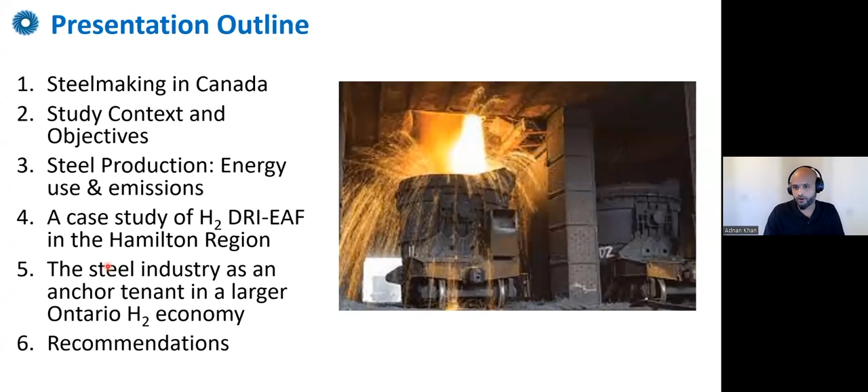So steelmaking in Canada and current decarbonization measures. When we talk about steel, steel is really deep rooted in our society. We cannot function without steel. It's really part of our daily lives. We use steel in different sectors, such as construction, industry, health, transportation, and other sectors as well. It's a key part of how we function as a society.

Now, Canada's steel sector is a $15 billion industry. We make around 13 million tons of steel products. We're among the top 20 steel producers in the world. And directly and indirectly, the Canadian steel sector employs over 100,000 people. So this is a rough number. On the graph at the bottom here, you can see the steel production by different countries. You can see Canada on the list, but quite obvious from the graph is there is one country that dominates global steel production, which is China, which makes more than 50% of global steel.

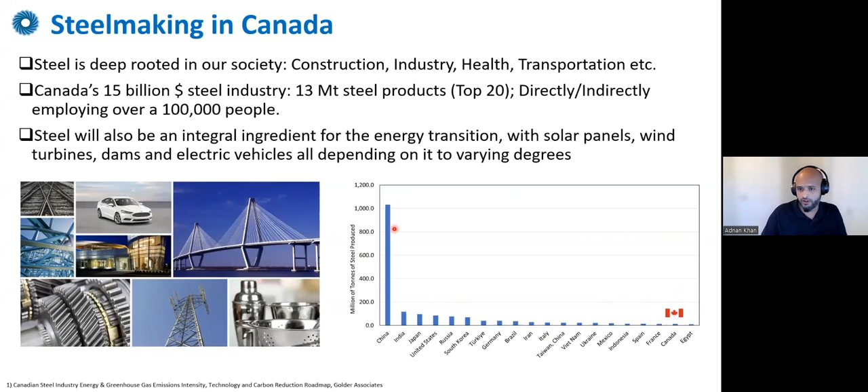Another important thing to highlight here is that steel will also be an integral ingredient for the energy transition, with solar panels, wind turbines, dams, electric vehicles, all depending on steel to varying degrees. So an integral piece of the energy transition.

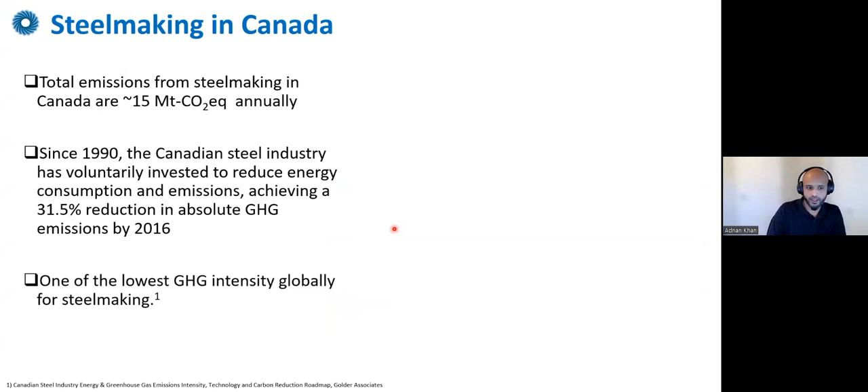Now, when we talk about the Canadian steel sector, the total emissions, like David was talking about, are about 2% of our country's GHG emissions, with about 15 million tons of CO2 annually. But what I need to highlight here is that since 1990, the Canadian steel industry has invested to reduce energy consumption and emissions, which has resulted in over 30% reduction in emissions by 2016. And this is one of the lowest GHG intensities globally for steelmaking.

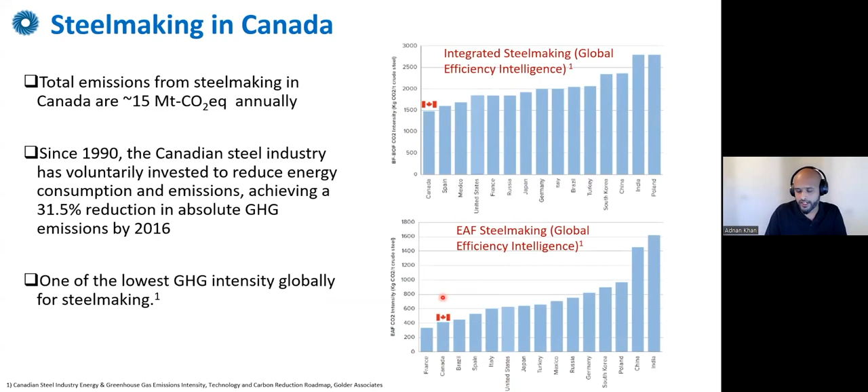The graphs here show 2 types of steelmaking. We'll talk about it in a couple of slides. On top is integrated steelmaking. You can see Canada is one of the lowest, if not the lowest, in terms of carbon intensity for integrated steelmaking. And also secondary steelmaking, which is through electric arc furnaces. Because of the low carbon electricity available in several provinces, we can make secondary steel with very low carbon intensities.

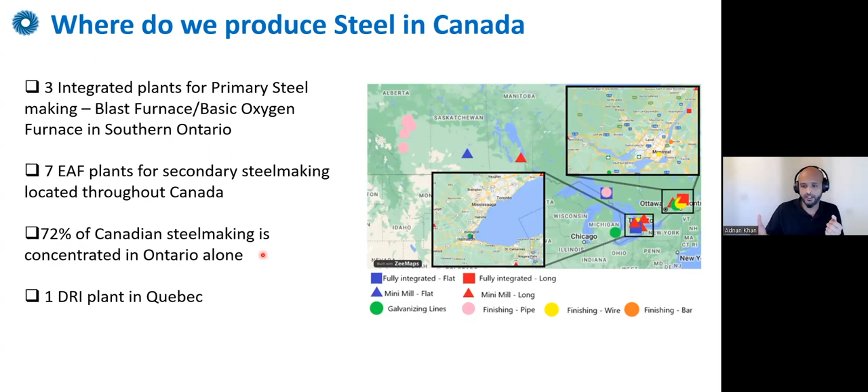Now, where do we produce steel in Canada? That's the first thing that comes to mind. We have 3 integrated plants for primary steel production that use the traditional route of blast furnace and basic oxygen furnace. I'll talk about it in a couple of slides. All 3 integrated plants are located in southern Ontario. We have 7 electric arc furnaces for secondary steelmaking throughout Canada. And 72% of our steelmaking is concentrated in southern Ontario. We also have 1 DRI facility in Quebec, and DRI is the core piece of our analysis here, and we'll talk about what DRI means in a slide.

So what do we do? Where does Canadian steel go?

In terms of our exports, Canada exports steel across the world, to more than 130 countries and territories, but primarily most of our steel goes to the United States, right? And that's really setting the context, that's some information on the Canadian steel sector and Canadian steelmaking.

And in terms of decarbonization measures, key announcements by the Canadian steel sector are as follows. So there's a few key announcements that came out recently. One is that Algoma Steel has announced transitioning from a blast furnace, basic oxygen furnace route, to a full electric arc furnace by 2026, right?

ArcelorMittal Dofasco plant has invested in a 2.5 million ton hydrogen-ready natural gas DRI furnace to replace the current integrated steelmaking. They've also tested, in their DRI facility in Quebec, partial replacement of natural gas with hydrogen. So these are some key developments in this transition to net zero for the steel sector.

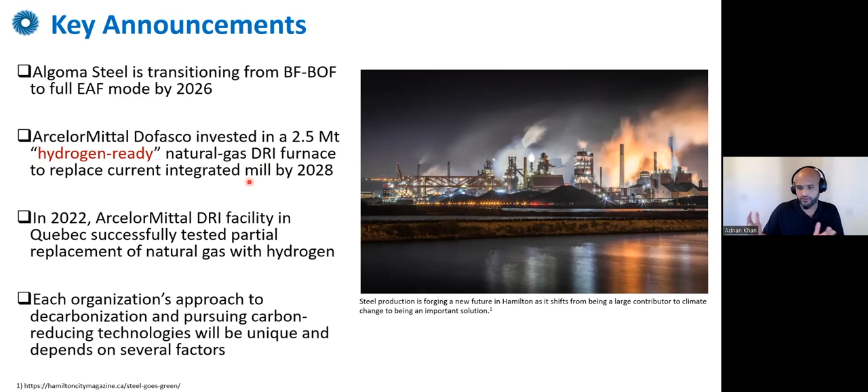But what I also need to highlight here, when I talk about all of these announcements, is that each organization's approach to decarbonization and pursuing carbon reduction technologies will be unique and depend on several factors. All right, so let me get straight into the study and really set the context of what the study was about. The study was in alignment with CSPA's vision to achieve net zero CO2 emissions by 2050.

The study is also very important in the context of a slowly developing market for low GHG steel as different industries look to decarbonize. And like I said before, there are various options for decarbonizing steel production being investigated, and the likely path forward will be a combination of several solutions. In the previous slide, I highlighted a recent announcement by ArcelorMittal Dofasco plant in Hamilton, which has committed to transition to a natural gas DRI facility, which has the potential to be hydrogen ready in the future, right?

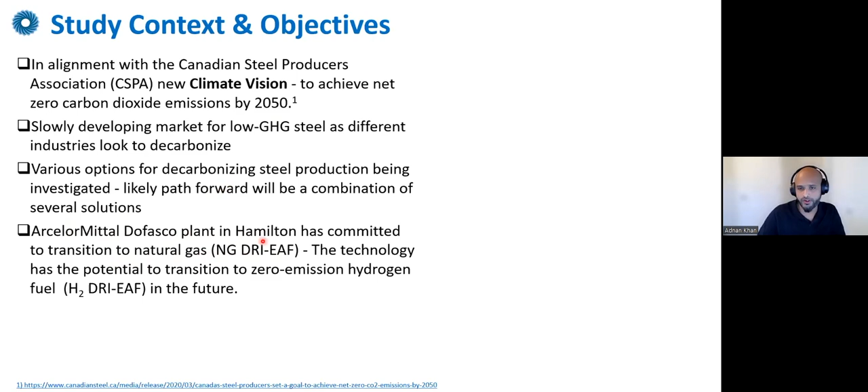So really the purpose of this report, and I'll take my time on this, is to explore the potential for hydrogen to decarbonize Canadian steel, with a focus on possible sources of low GHG hydrogen and the cost it will take to deliver hydrogen at scale to the Dofasco plant. So it's really around the Dofasco plant that our study was centered.

I also need to highlight for the audience that options beyond the adoption of hydrogen for steelmaking are not discussed in any depth in the report, but should be considered an integral part of the steel sector's decarbonization strategy. So that's important to keep in mind.

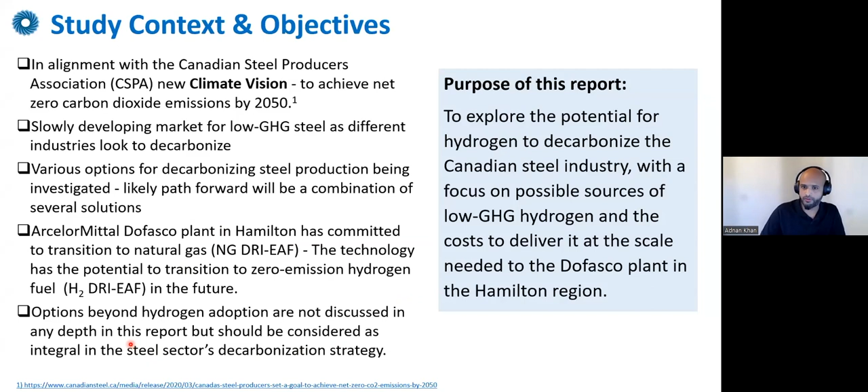The DRI routes, whether it's the natural gas DRI route or the hydrogen DRI route, typically use lower energy because the iron ore is reduced below its melting point. In the natural gas DRI route, we use natural gas, which is converted to carbon monoxide and hydrogen in the furnace, which is used as a reducing agent and also provides your energy source. Then the direct reduced iron can be converted to steel in an electric arc furnace.

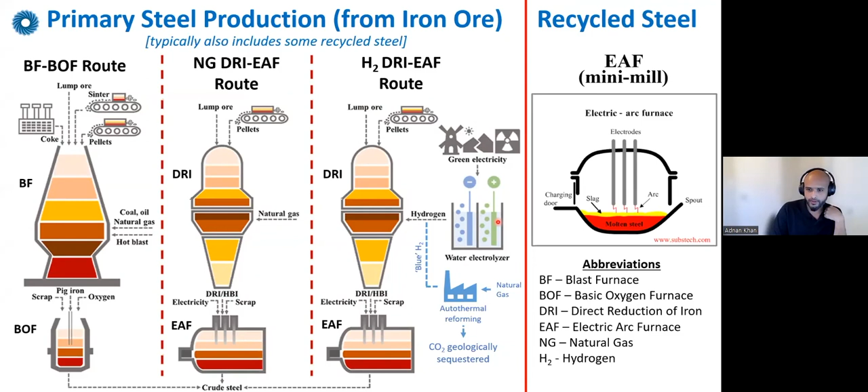And just 1 second. All right.

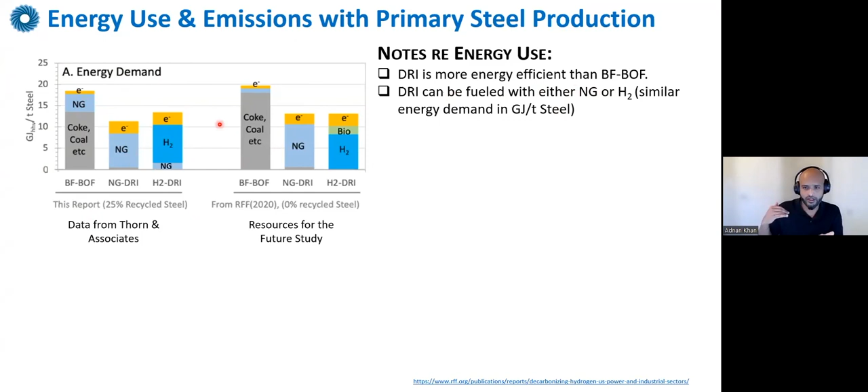The DRI can be fueled with either natural gas or hydrogen. If you look at both sets of data, the hydrogen DRI route requires similar energy demand versus the natural gas DRI route. But then when we look at GHG emissions, and these are basically scope 1 direct emissions, compared to the traditional blast furnace, basic oxygen furnace route, on-site emissions could be significantly reduced by the transition to a DRI route. So when you transition to natural gas, you could potentially reduce emissions by about 70%.

But another key thing I'd like to highlight here, which is really the key takeaway message from this slide, is this. Now, compare natural gas DRI versus hydrogen DRI. Let's talk about this transition, which is going to happen in the Dofasco plant, which we're envisioning. Assuming a natural gas price today of $5.50 a gigajoule, and at best case scenario, if you assume a hydrogen price of $2 to $4 a kg of hydrogen, which is basically about $14 to $28 a gigajoule.

What straight away strikes you is the fuel energy price with this transition from natural gas DRI to hydrogen DRI will mean that your energy cost will be 2.5 to 5 times more. So the key message here is that minimizing the cost of hydrogen supply will be critical. We need to build supply chains that can deliver very low cost hydrogen if we really want to make this economically viable.

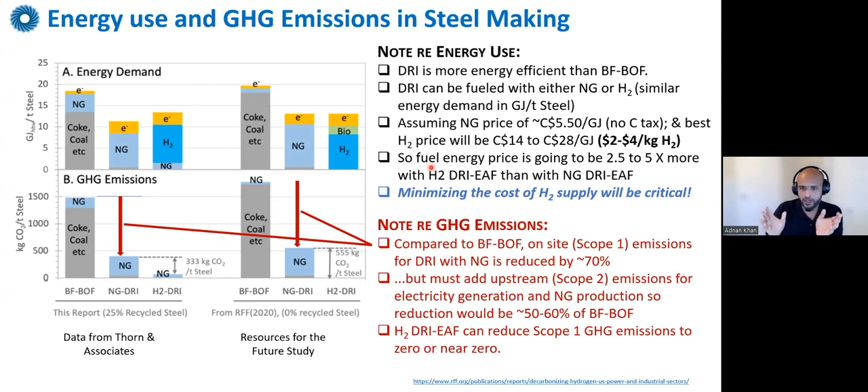With a forecasted decrease in the cost of these electrolyzers, we can afford slightly higher electricity prices in the future. But even in a situation where we have lower capital costs for electrolyzers in 2040, you will still require very high capacity factors for this electricity.

And you can afford electricity cost of slightly higher, about 5 cents a kilowatt hour or 50 Canadian dollars a megawatt hour, to make hydrogen at 3 Canadian dollars a kg. So that's about water electrolysis.

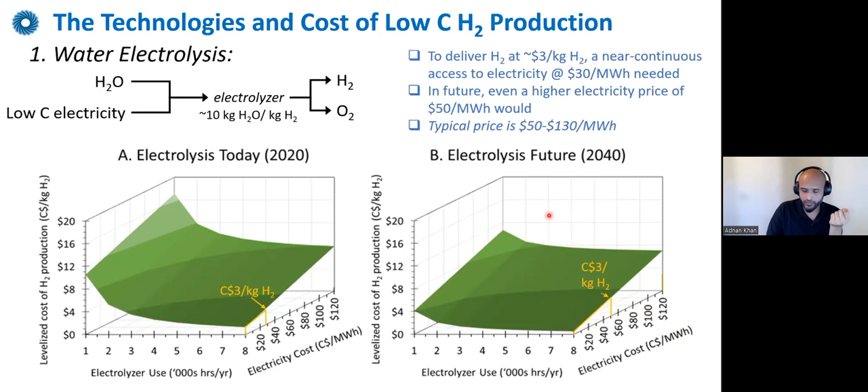So what about blue hydrogen now? Hydrogen can also be made by natural gas reforming, and that's how primarily we make all of our hydrogen in Canada, but also the rest of the world. And when we talk about natural gas reforming, you can do steam methane reforming, or you can do autothermal reforming. And when you couple these technologies with carbon capture and storage, you get blue hydrogen, right? And the carbon capture rate will determine the carbon intensity of your hydrogen.

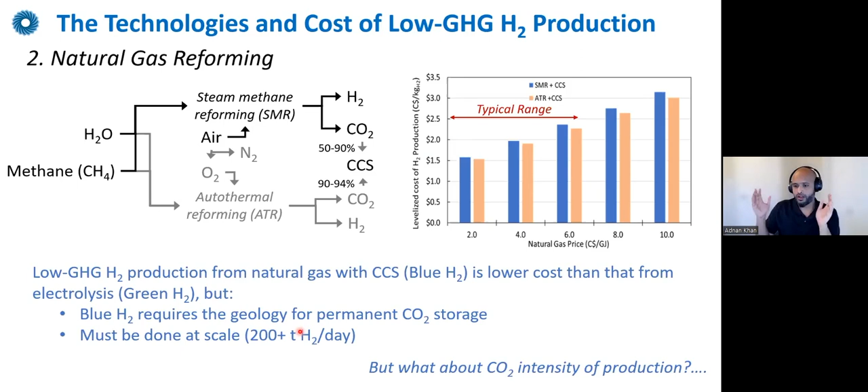But in certain provinces, and I can highlight Alberta where we're sitting right now, where we don't have a clean electricity grid at the moment, producing hydrogen using the electricity from the grid will result in very, very high carbon intensity of the hydrogen produced, probably even worse than doing gray hydrogen, right? And what about blue hydrogen?

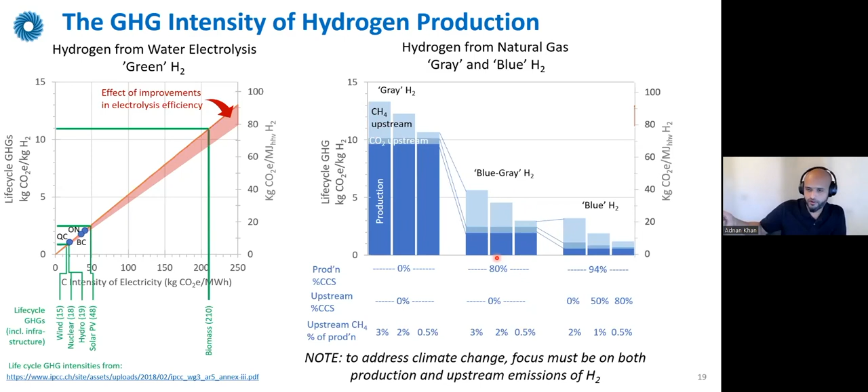So the key message again here is we must address climate change. Therefore, we must focus not only on the technology for carbon capture and storage, but we must also address the upstream emissions from methane extraction and transport to your facility for making hydrogen. All right. So this is really laying out all the background work on what hydrogen production costs and what the carbon intensity of hydrogen produced will be.

Let's talk about specifically supporting the hydrogen DRI facility in the Hamilton region, right? So like I said at the start of my talk, we're really looking at the Hamilton region, the Dofasco plant, which is basically transitioning to this 2.5 million tons of DRI facility. And due to the availability of public data, what we have assumed in our analysis is the MIDREX process.

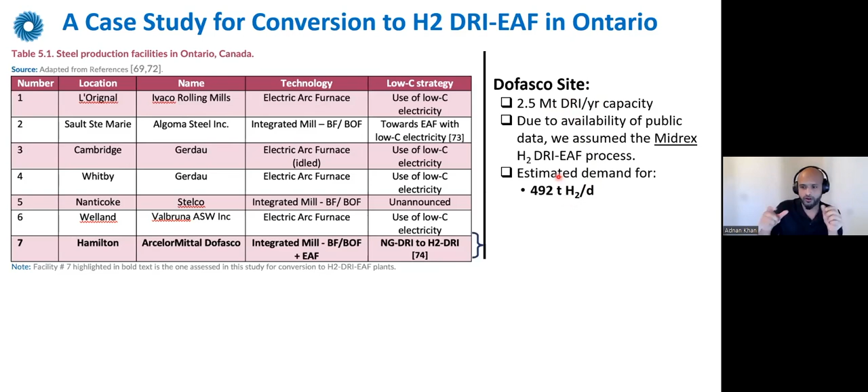And when you talk about 2.5 million tons of DRI, the estimated demand to make this much direct reduced iron is about 492 tons of hydrogen per day. Okay, that's a number I'd like to stick in your heads, 492 tons of hydrogen per day. What does that mean? 492 tons of hydrogen per day is 6% of all hydrogen produced in Canada today.

As an... used primarily as an industrial feedstock, right? But what if I have to make all of this hydrogen via water electrolysis, or green hydrogen? To produce all of this hydrogen via electrolysis, we will require 27 gigawatt hours of electricity per day. That's 6.5% of all of Ontario's electricity generation, which was about 153 terawatt hours per year.

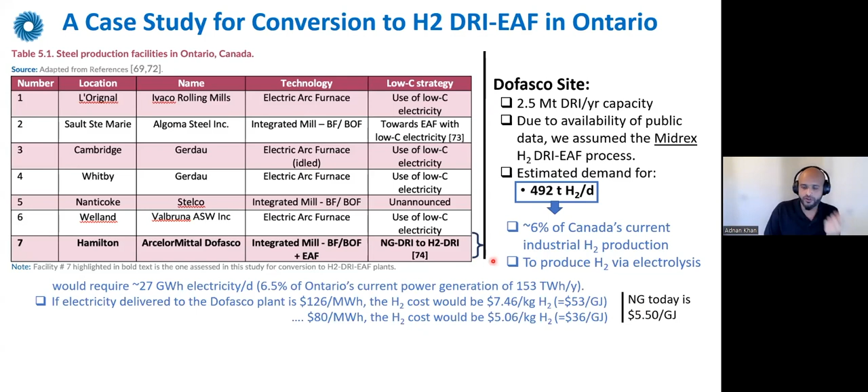Now, even if you talk about cost, which we highlighted earlier as well, if you have electricity delivered at $126 per megawatt hour, you're talking about the cost of hydrogen produced at $53 a gigajoule, which is 10 times the cost of natural gas. Really not economically feasible. The scale and the cost of hydrogen produced from water electrolysis tells us that it is difficult to see how green hydrogen produced at the Dofasco site could be a cost-effective solution in the near future. And I'd like to stress that, in the near future. We do think that green hydrogen will definitely play a role in the long-term scenario, but in the near future, it is difficult to see how green hydrogen can support all of that hydrogen demand by that DRI facility.

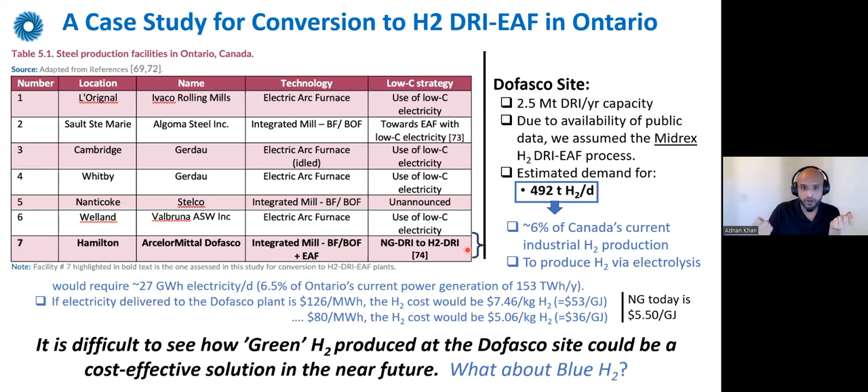So what about blue hydrogen? Now, once I talk about blue hydrogen, I need to talk about CCS, right? The carbon storage potential in that region. So how much CCS potential do we need? At 492 tons of hydrogen per day, we're talking about sequestering about 1.6 million tons of CO2 per year. Now that's significant, but that's great, because even to make CCS work, we need to work at those capacities to really drive down the cost.

Now, when I talk about CO2 storage potential, Ontario has some potential in Southern Ontario, but there will be some competition for this pore space. Most of the CO2 storage potential for us in Eastern Canada is actually across the border in the United States, in neighboring states of Ohio, Pennsylvania, and Michigan. I have a table here which basically summarizes the CO2 storage potential in these regions.

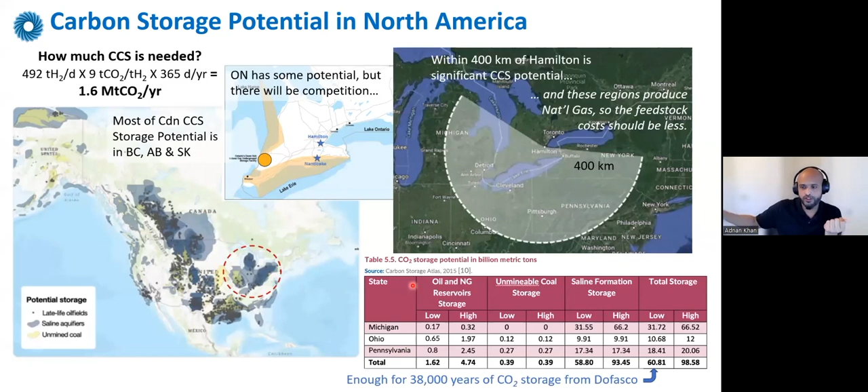So what we did in this study is look at producing hydrogen in these areas across the border in these states, which is about a 400-kilometer distance from Hamilton, and can we pipeline all of that hydrogen to the Hamilton region? These areas also have availability of low-cost natural gas, so the feedstock cost for making hydrogen should also be lower. So how do we deliver all of that hydrogen to the Hamilton region?

I have here two graphs. The first graph on the top is basically hydrogen pipelining costs. What would be the cost of pipelining all of that hydrogen to the Hamilton region, which is 400 kilometers from there? In principle, we can pipeline hydrogen anywhere between 1 to 1.6 Canadian dollars a kg of hydrogen, depending on the capacity utilization factor of the pipeline itself. At full utilization, we can drive down the cost to about 1 Canadian dollar a kg of hydrogen.

And if I take this chart and add all of the supply chain cost to it, which is basically the cost of production, the cost of capturing CO2, sequestering CO2, the hydrogen pipeline, we're looking at anywhere between 3 to 4 Canadian dollars. This is delivered cost to the plant. And if we optimize the cost for 492 tons of hydrogen per day, we're still looking at 3 Canadian dollars a kg of hydrogen, which is about $22 a gigajoule, 4 times the natural gas cost. So it's still significant, still much higher than natural gas as an energy source.

Another challenge here is that a dedicated 400-kilometer pipeline only feeding one plant has a higher risk that could drive up costs and reduce project viability, and is also less likely to attract public support. So the next question that comes to mind, and this is all a systems level approach of thinking of how this net zero transition needs to happen: are there other potential markets for low carbon hydrogen apart from the steel sector that could help reduce the cost while addressing climate change for Ontario and for Canada in general?

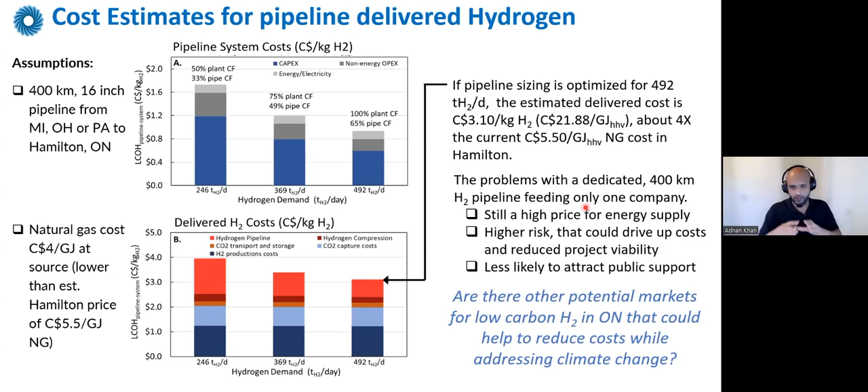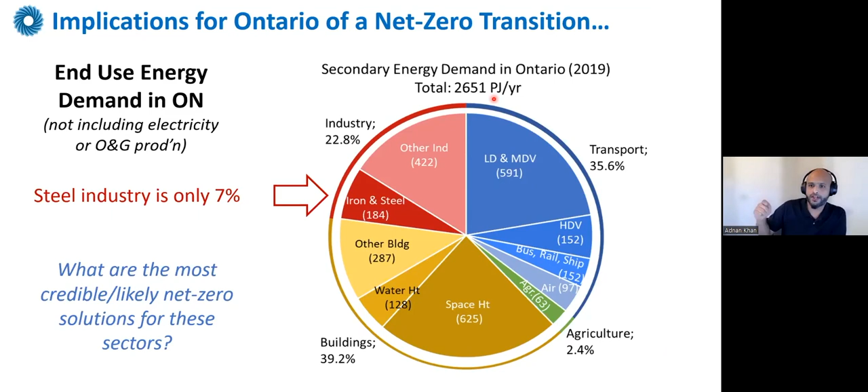They're divided into different sectors, transportation and buildings being the main consumers of all of the energy, followed by industry and agriculture, right? And once we look at these different sectors, the next task for us is to identify the most credible net zero solutions for these sectors, because I need to remind you, we basically power all of these sectors using carbon-based fuels coming from fossil fuels that have really driven the standard of living that we enjoy today. But if you're talking about a net zero solution, we'll have to replace these carbon-based fuels with net zero fuels such as electricity, such as hydrogen or biofuels, right?

So I'll show you an example of what we did for the transportation sector. We don't have time to cover everything, but I'll talk about the transportation sector. So transportation sector 2019, the majority of transportation energy use is coming from light duty vehicles, followed by heavy duty vehicles, air and other sectors. The next thing we do is identify credible net zero options to replace current carbon fuels in these different sectors. So for example, light duty vehicles, we expect the majority of light duty vehicles to be electrified in the future. Similarly, the majority of medium duty vehicles will be electrified with the use of battery electric vehicles. However, for heavy duty vehicles, we potentially see a much bigger role for hydrogen, right?

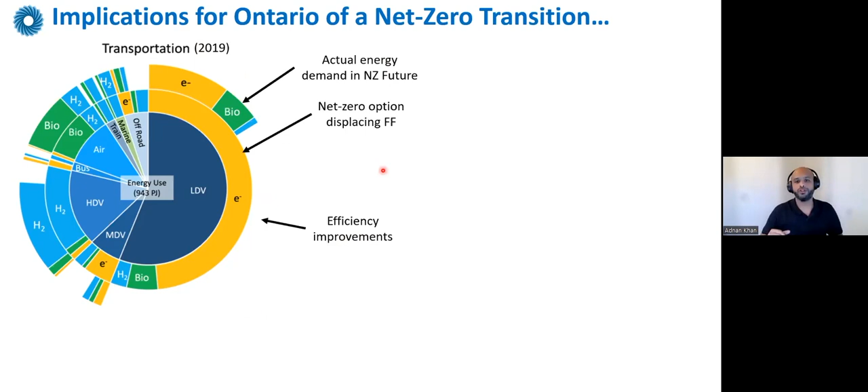Now, once you put all of these things together, what you can calculate is the actual energy demand in the net zero future, right? And because a lot of these solutions, battery electric vehicles or hydrogen fuel cell electric vehicles, are much more energy efficient than current internal combustion engines, all of that transition will result in efficiency improvement. So in a net zero future, the total energy requirement will be lower than what we use today. And we can do this for different sectors. So here we've done the same thing for agriculture.

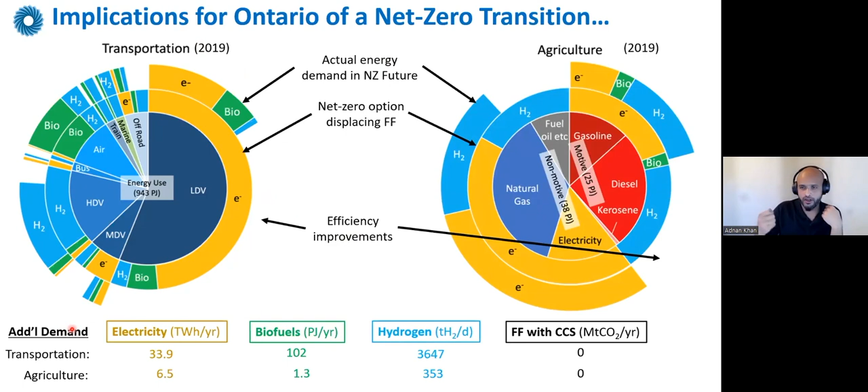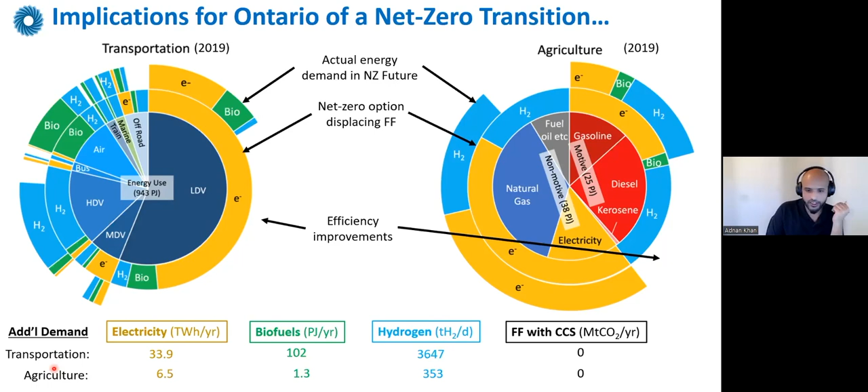And what I'll try and do now is summarize things. So what we can do is calculate additional demand of these net zero fuels in 2050, right? This is all based on 2019 numbers. In the transportation sector, we'll need an additional 33.9 terawatt hours of low carbon electricity, 102 petajoules of biofuels, and 3,647 tons of hydrogen per day to really drive this net zero future. And we can do this for different sectors such as transportation, agriculture. We've also done it for buildings, basically for space heating in commercial and residential buildings, but also for industry. And what I'll go straight to is this summary.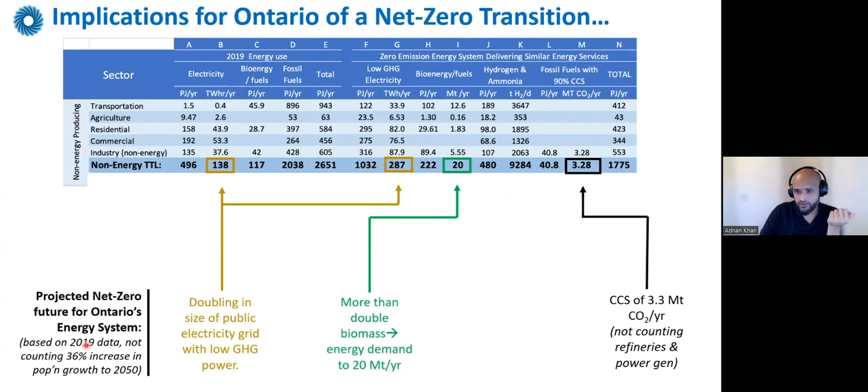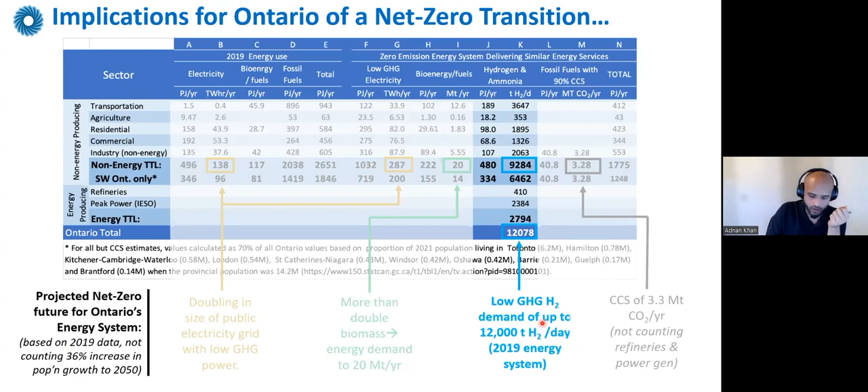But the most important one I want to get your attention to is the potential hydrogen demand to really drive the decarbonization of these different sectors. We're looking at potential demand of low carbon hydrogen of up to 12,000 tons of hydrogen per day. And this is just Ontario. These are not Canada-wide numbers. We're talking about Ontario as a province, right? And 12,000 tons of hydrogen is significant, but it's also what we need to drive down delivered cost, right?

So remember, how do we talk about this? I talked about the steel sector, but also the larger Ontario economy. Can we really drive down the delivered cost to the steel sector, right? So if you're delivering large volumes of hydrogen, which also caters to other sectors, you can decrease the pipeline cost. It can be almost a 50% reduction in the delivered cost by the pipeline.

And also the overall delivered cost of hydrogen, you can decrease it to about 2.5 Canadian dollars a kg of hydrogen when you transport large volumes. So economies of scale really dictate all of these decreases in cost.

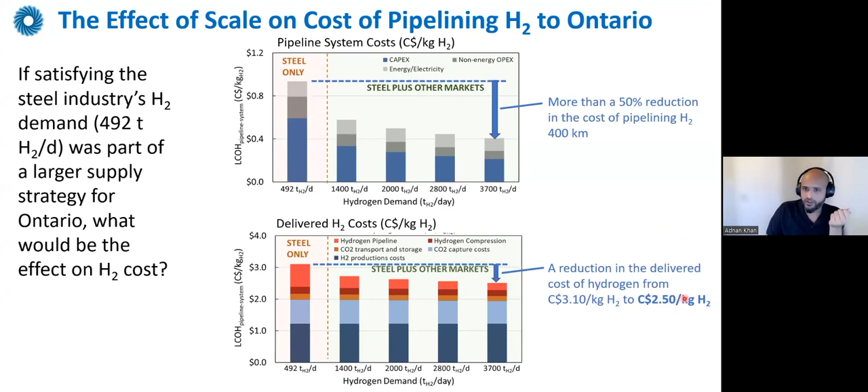At 2.5 Canadian dollars, we're looking at an increase of fuel cost by about $112 to $121 per ton of steel, from going from natural gas DRI to hydrogen DRI, right? If you take those numbers and divide them by your scope 1 emissions, what you really get, and this is the number I want to highlight here, is the CO2 abatement cost, which could be in the range of $200 to $360 per ton of CO2.

So despite those low costs of hydrogen, we're still looking at CO2 abatement costs in this region, which, although it looks high, is not too far. In 2030, we know announced carbon taxes are about $170 per ton of CO2, right?

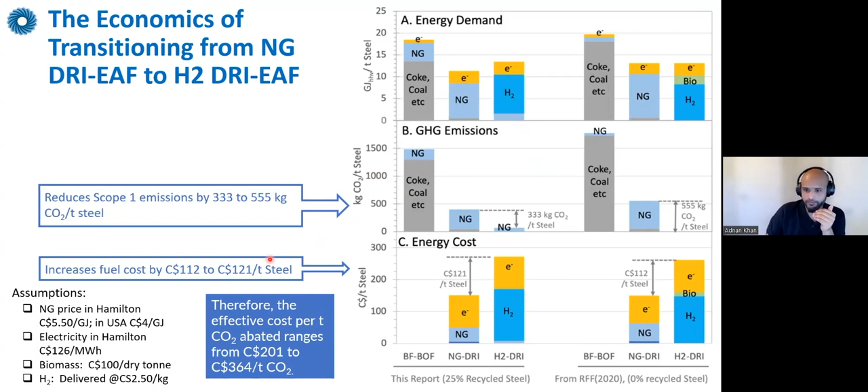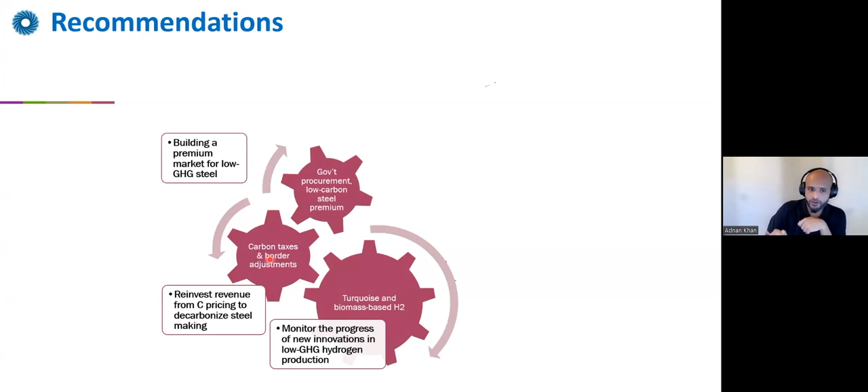All right, so let's try and wrap up things in terms of recommendations that came out from our analysis. The first thing I want to highlight here is the steel sector should look at reinvesting revenue from carbon pricing to decarbonize steelmaking and should work very closely with the government to do so. We should monitor the progress of new innovations, such as methane pyrolysis to make hydrogen, right? Low GHG hydrogen production. This is what could be a breakthrough. We should work together with the government to build a premium market for low GHG steel.

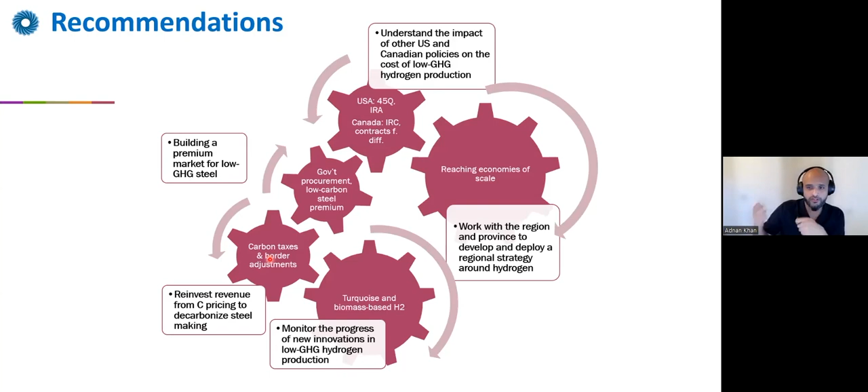But the two most important ones that really come out from our analysis is you need to drive economies of scale, and therefore it's not really about only decarbonizing the steel sector, but we should work with the province and the federal government to really develop a regional strategy around hydrogen. And also work together with our neighbors in the US and understand the impact of the policies and different incentives announced across the border, which will affect low GHG hydrogen production.

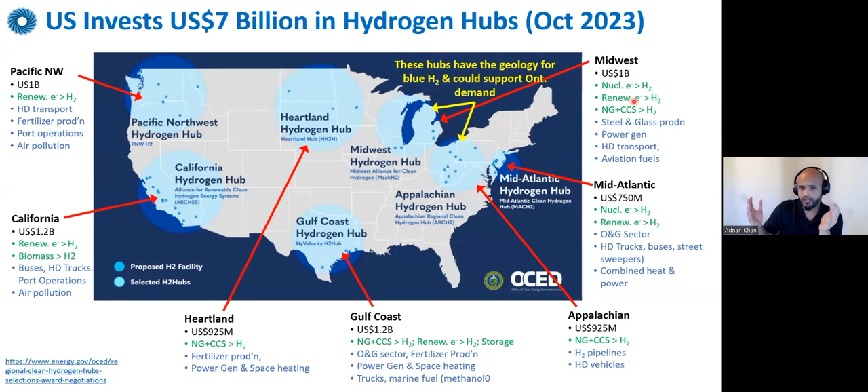And the current announcement, although it's still developing, these hubs are actually looking to produce low-cost blue hydrogen, which is basically natural gas plus CCS, right? And we need to work on a framework where we work together with our neighbors to develop regional strategies around the use of hydrogen. And with that message, I would like to wrap it up and conclude.